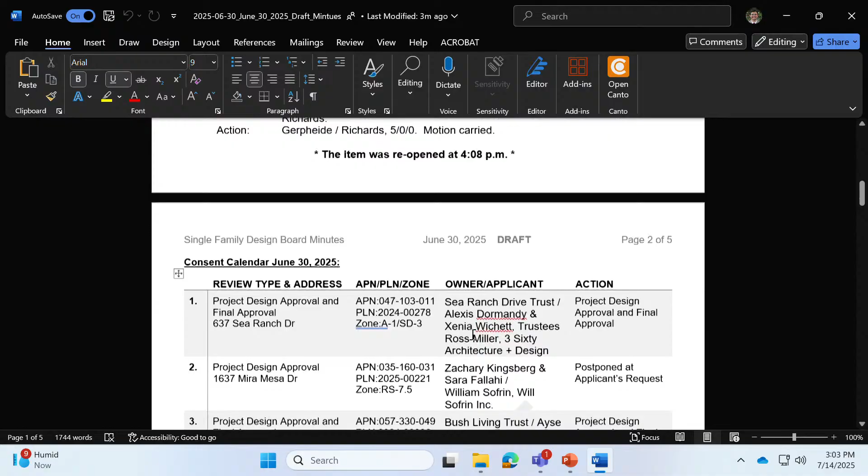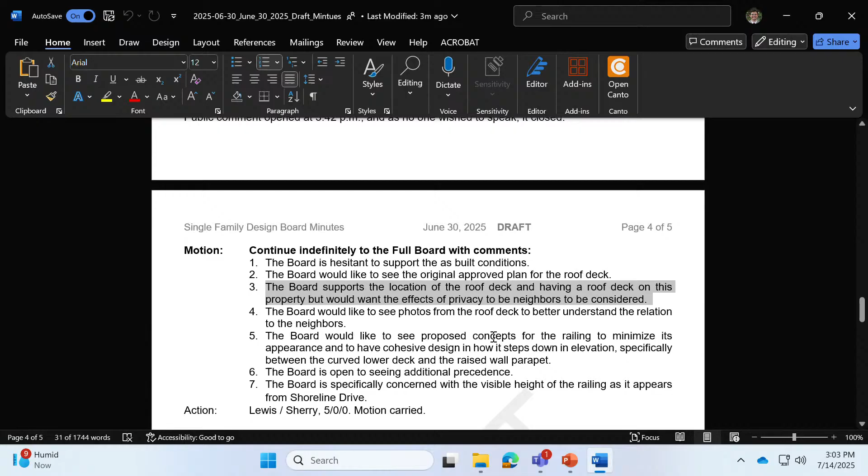Chair Lewis, item 2, comment 3 - the board supports location roof deck, item 3, like the end of the sentence, privacy of the - was it part of your? But would want to know the effects of privacy for the neighbors, to be considered. Thank you, just that, I didn't see anything else.

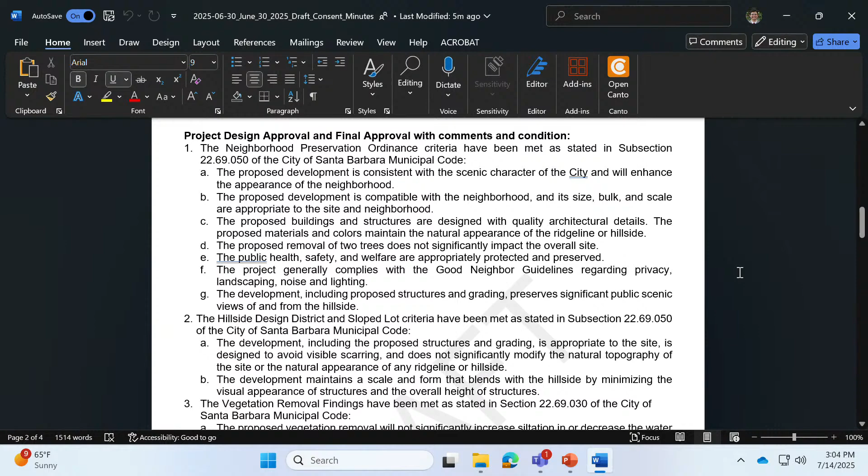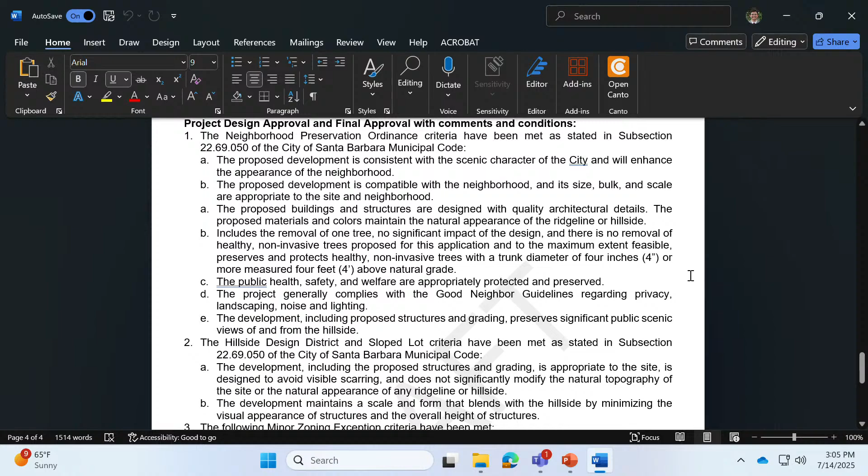Next is approval of the minutes from the consent meeting on June 30th. Keep going. You go down to the bottom of the page.

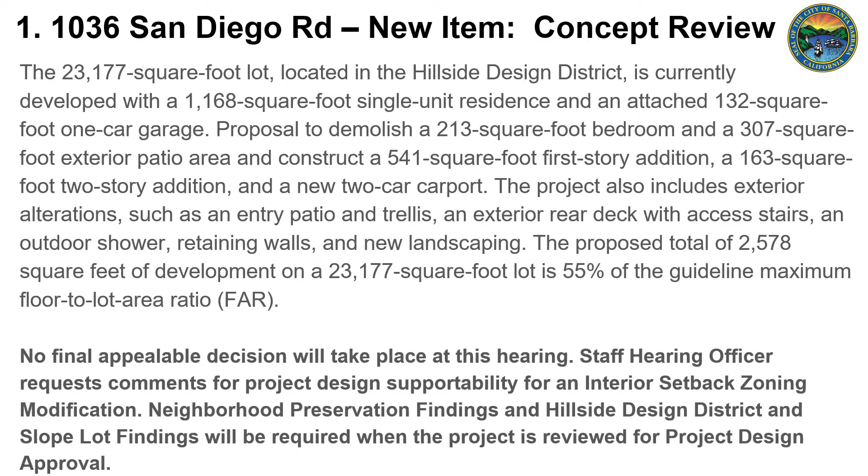No final appealable decision will take place at this hearing. Staff hearing officer requests comments for project design supportability for an interior setback zoning modification. Neighborhood preservation findings and Hillside Design District and slope lot findings will be required when the project is reviewed for project design approval.

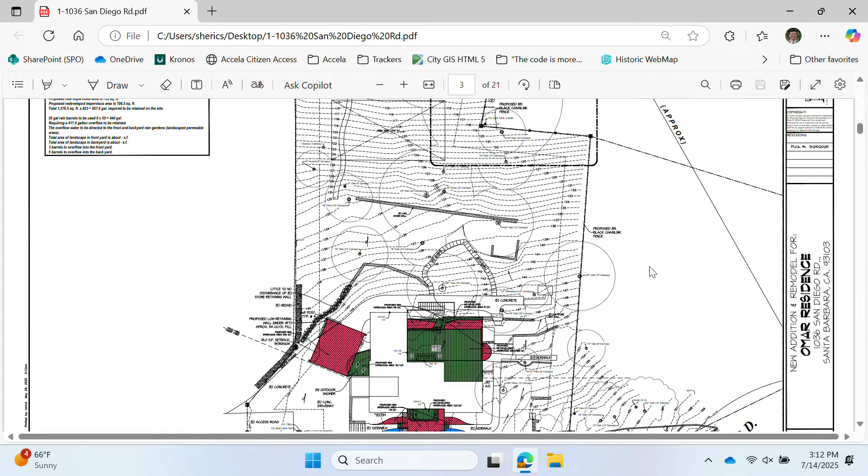In the other areas, we provided drawings showing all the details. This is showing you the hillside. Sorry, I'm used to PowerPoint, so this is challenging a little bit for me because it's a touch PDF screen. There's a touchscreen, and a mouse. Okay, the touch screen solved all the problems.

Very appreciated. So this is the hillside, and now this is the house. This is the carport, and this is right here. You see the 10-foot, so this is the carport. This is the front entrance facing east.

We're not really doing big things there, but just beautifying, and I'll show you the pictures of how you enter the house. This is the proposed addition, and you'll see that we will demolish an existing one-bedroom, and there is a patio here that's really not heavily used, and this is where we would build a 500 some change square feet. Then on top we're going to have a beautiful staircase here, and on the second story we're going to have a primary bedroom with a bathroom, that's going to be about 163 square feet. Again, I don't get my numbers perfect, and I'll explain that later.

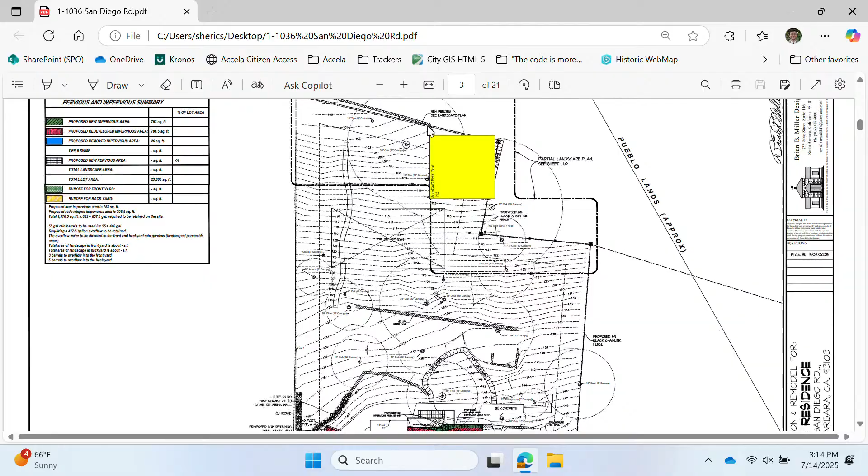So the green is the addition, as well as this carport, and then modifications here to the front. Then we propose to do some landscaping down here, including a fence and finishing a retaining wall that's only 30 inches in height. And I will cover all of that as well.

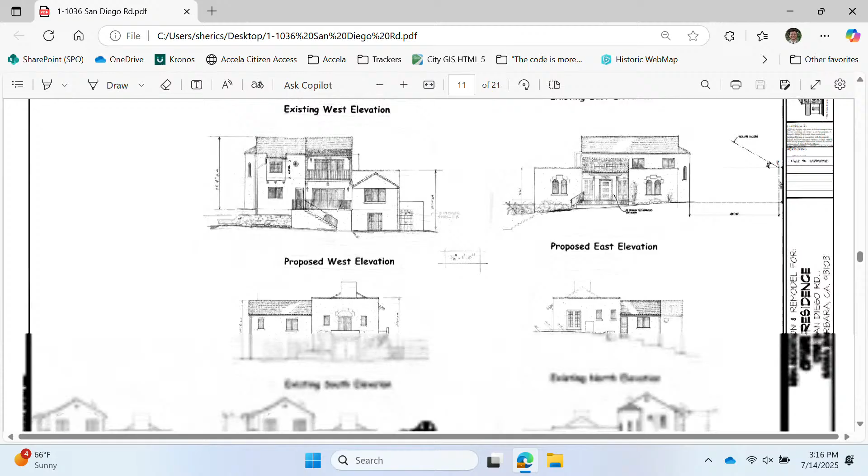Notice here and here, this is all existing and will not be touched. This is the second story addition, and this is the staircase I've been talking about. Just to complete this, as you come up the driveway, these are the stairs to enter the house on the east side.

So this is the south side. This is the one-car garage. Obviously this is a very old house with only a one-car garage, but we have a lot of space here and we thought there's no need to really change this beautiful picturesque view. So the best solution was a carport, and this is really the best place to fit it.

Now, this is what the second story would look like from this side. And this would be the new look without the carport, and with the carport addition.

And now finally, the north side. This is the current structure, everything stays the same, and now we have the staircase I talked about, and this is just... I have to be personal here.

My oldest brother lives in Spain, and this is just beautiful, absolutely beautiful. You see this in some of the structures and homes in Spain, and Brian did a great job.

So I think this covers everything I wanted to cover about the building and the additions, and I just wanted to spend a little bit of time talking about the landscaping. Again, this is the existing house, and this is our driveway coming up. That's the entrance. Now this is the west-facing side, and this is the hillside.

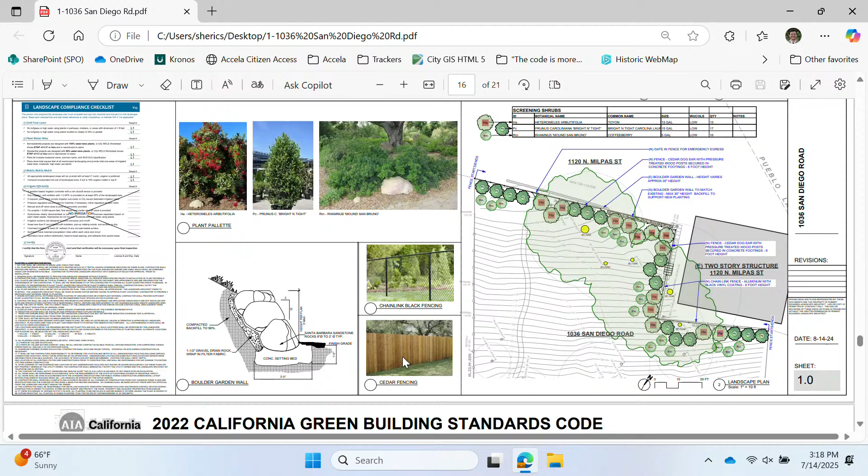What we would like to do is some landscaping down here. This is the parking lot for the ball field, and there's fencing on this side - this is really a privacy and safety issue. What we're proposing here, I'll show you a picture, would be cedar fencing on that side. Even though it's not facing a public area or a street, it would still be beautiful to look at. And then we have landscaping all along the side.

On the side of the property going up this way, we would do fencing - chain link, black fencing like this - matching what the ball field is using on the other side that's visible from our property. I think that's all I had to say. I really appreciate your patience with me, and I'm happy to answer any questions.

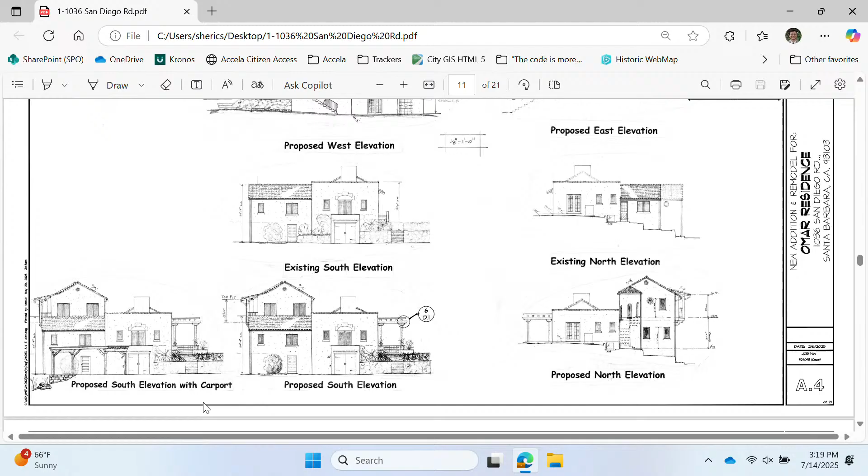I know in one of the drawings I studied this morning, some of the details drawings. Through the chair to the applicant, if you go to sheet number 2, if you type in number 2 in the page numbers, that should take you to the site plan.

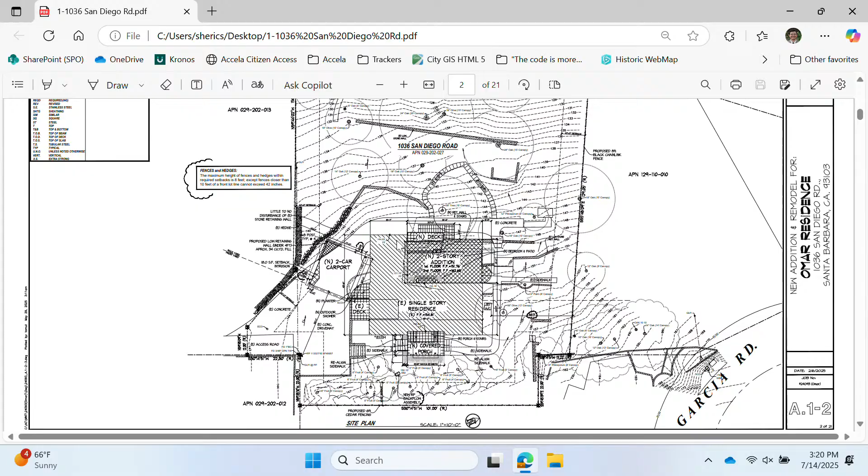If you scroll down a little bit, the carport I think is to the left of the home, by the carport and deck. Right around here, that area, the little triangular space. Okay, I know I saw it in one of the drawings. So for the board, it's over here.

Board Member Richards, any questions? Yeah, are there any trees being proposed to be removed as part of this project? No, sir. Okay, fantastic. And then does the carport have a solid roof over it, or what is it? I didn't see the details.

I believe so, the material we talked about. Yes, it says standing seam metal roof on your section and elevation. Okay, and that's on page 12 if you want to go to it. Yeah, here it is, thank you. Okay, all right, those are all my questions.

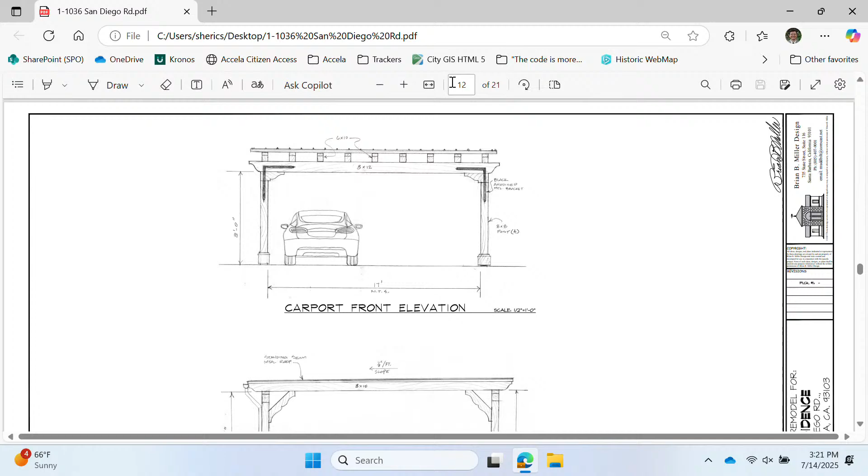Okay, Board Member Mosley. I have one question regarding the height, the maximum height at the highest roof pitch. I think I saw it on the elevation. Is it 25, or can you go to it?

It's just, yeah, page elevations, page 11 I think has the elevations. There you go. I think it's 25 feet and 4 inches. Yes, 25 feet and 4 inches. Okay, just wanted to confirm that.

And this project is still in their application completeness review, and so that was one of our staff's comments, was to clearly state the noticed height. So that will be addressed within a resubmittal.

Thank you. And do you know from the conversations with the architect about the design of the railing of that balcony? Right here, is that, or up here?

Yes. Oh, maybe Board Member Mosley, may you turn on your microphone when you're speaking? It's just a reminder. It is on. Oh, maybe it was not close enough. Yeah, maybe it wasn't. Thank you.

The design of the railing, both the stairs and the balcony. I can see some details that it was drawn, but wanted to see about the materiality. Was there any conversation on what it will be? The material, I have to say I'm recalling from memory, so we're happy to answer that more formally. But I know we talked about doing wood up here, but metal for the staircase. Okay, that's correct. Okay, thank you.

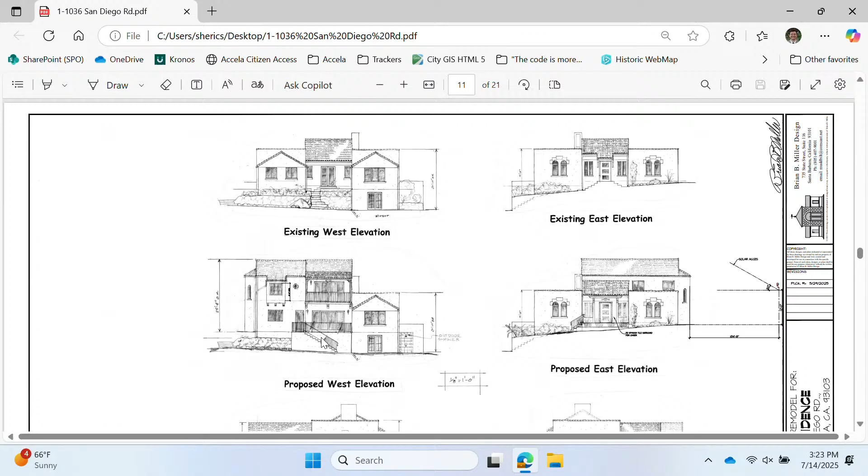I think that was my questions. Okay, Board Member Sherry? Can you go back to page 2, please, the site plan?

And I just want to understand and confirm that the need for the interior modification is because there's no other way to fit the carport, due to the interior setback snaking around and going through that driveway. The best angle and location to put the carport, encroaching into the setback the least, is in the configuration and angle you have now.

That's correct, right? I would like to confirm that, because this carport ended up taking a lot of time and a lot of measurements of different possibilities. And this is the best - I think Brian answered this to the city in the first letter. It basically ends up involving a lot of slope filling, et cetera, and would get pretty complicated if we didn't do this. So this was the best possible scenario with the least amount of disruption.

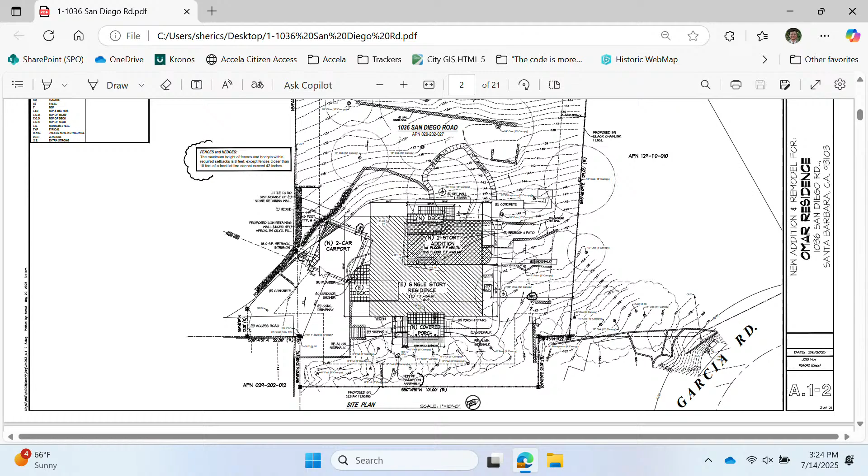Board Member Graffiti asks a question: just to confirm, does the property back up to a property line with the Santa Barbara Bowl on the side, or was that about parking? Can you go back to that image?

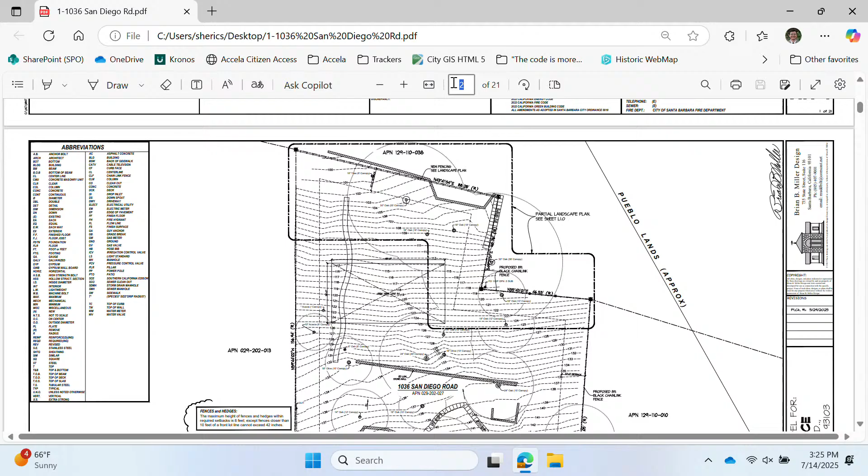So we're very close to the bowl, but we don't exactly back up to it. Let's go to the aerial image, slide 16. Here it is — this is the parking lot for the bowl, and this is all bowl property. We're on top of this sloped hill.

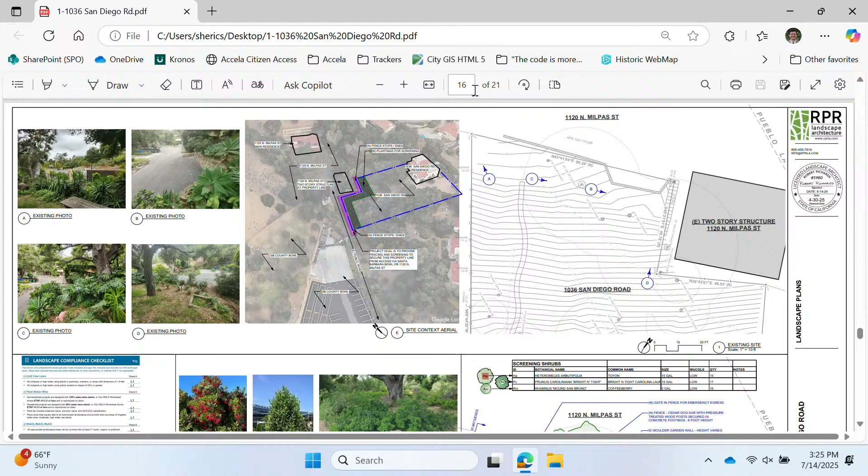Okay, thank you. I think all my other questions are answered. Appreciate that. Okay, we will move to comments. Board Member Richards, do you want to start?

Sure. I think it's an attractive project. You're trying to locate the carport in the best possible location given the constraints you're having to work around, so I can support the modification.

Board Member Mosley: I agree, and I think that's the best configuration for the carport, so I can support the interior setback modification. It's a nice project, developed cohesively to the second story, and I would like to see more details and materiality next time.

Absolutely, sure. Board Member Graffiti: Yeah, agree. As long as the materials and details are all cohesive with the existing architectural style, I'm happy to support it. Would also like to see imagery for landscaping and detailing inspiration at the next meeting.

Board Member Sherry: I agree with all the comments. My only concern is the standing seam metal roof on the carport. I understand you can't see it from anywhere else, so I'm not concerned about neighbors seeing it, but you will see it from your second level. It introduces a different material that isn't necessarily in keeping with this style of house, so I'd want you to make sure that's the most sensitive material choice for a carport roof to be in keeping with the Spanish colonial style.

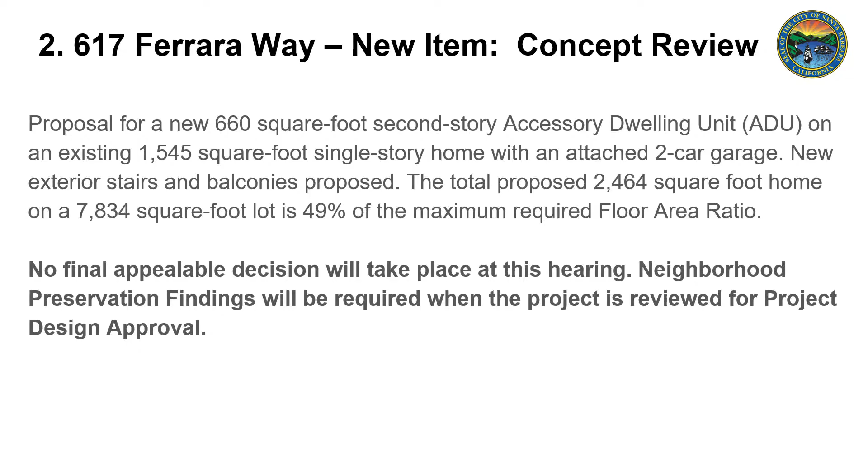Neighborhood preservation findings will be required when the project is reviewed for project design approval. The reason this project is before the board is because the accessory dwelling unit doesn't meet the architectural design criteria for ADUs, because it's a second-story ADU that is not constructed entirely over the garage. I also wanted to provide background on the FAR: it is 49% without the ADU, which is what's in the scope. But with the ADU, which the applicant provided an accurate FAR for, it's 70%. The difference is that without the ADU it's 1,545 square feet, and with the ADU it's 2,205 square feet. So the total square footage in the scope is a little off, due to a staff error in calculations, but I wanted to provide that clarification.

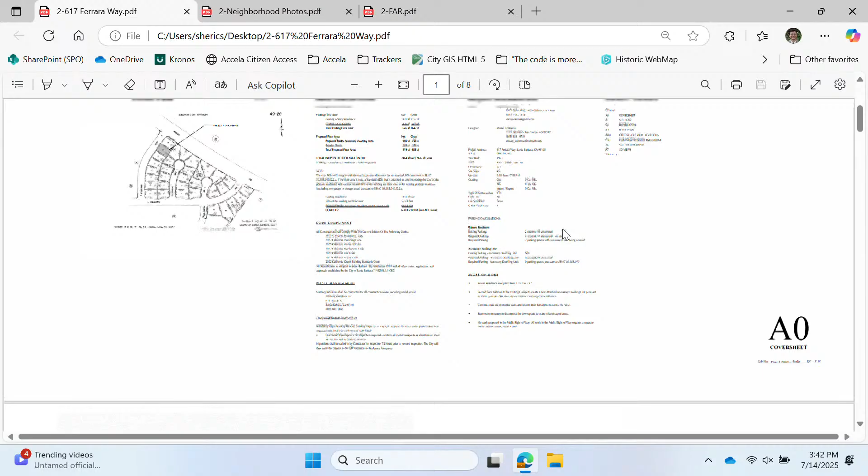Thank you all for your time. I am here to present the proposed ADU that is going to be a second floor addition above the garage. As Sebastian mentioned, it's not entirely above the existing garage footprint -- it extends about 250 to 300 square feet beyond the garage outline footprint.

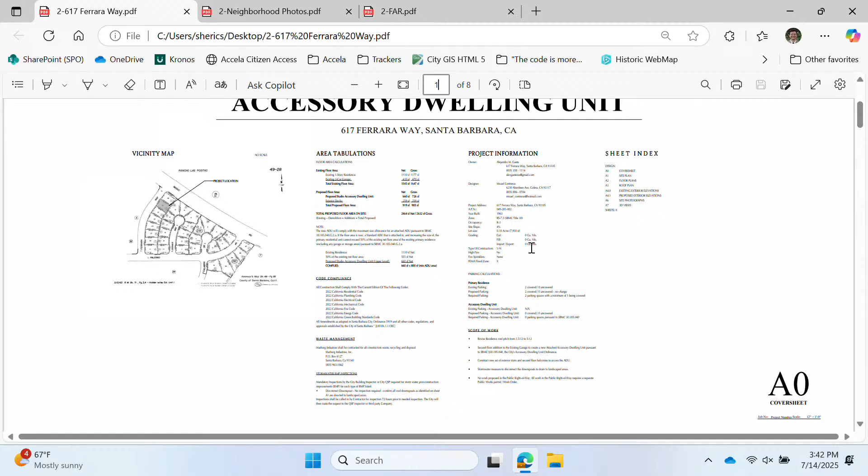The area this is in is on Modoc, right across from the Emmanuel Church that is directly across the street from this property. It's mostly a residential area with many multi-family apartment-style buildings, so it's a very eclectic architectural style throughout. I went through the archive drawings and noticed a lot of them had varying roof pitch slopes ranging from 4-and-12 to 6-and-12, so that was the reason we went with 6-and-12.

We also wanted to add more volume in the interior of the spaces. Another part of the scope of the project is to change the roof pitch of the existing residence to 6-and-12 to match the ADU.

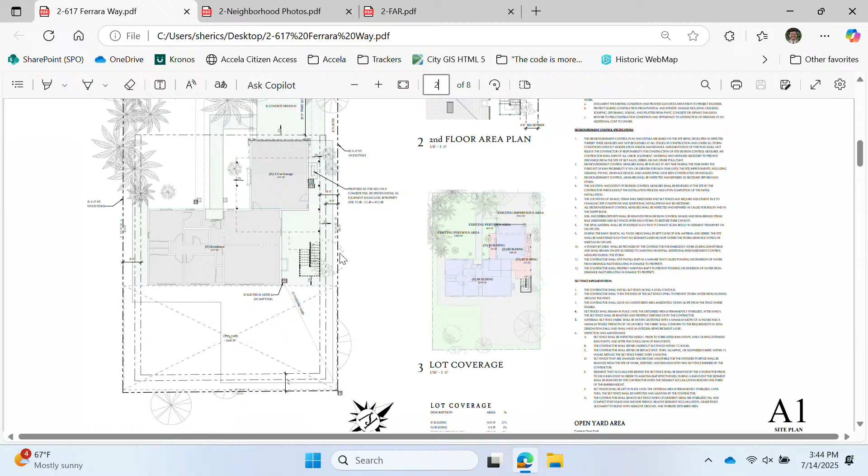Here you see the area site plan. Nothing is changing on the ground plane as far as solid volumes, though we are adding stairs to get up to the ADU towards the side yard. Here are the floor plans, showing access from a balcony on the south side into a living area and up to the one-bedroom ADU unit, with a deck facing the street on the north side.

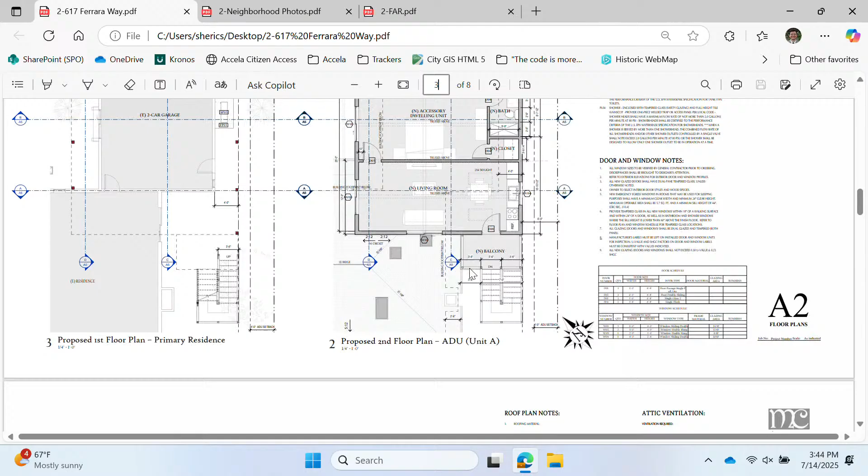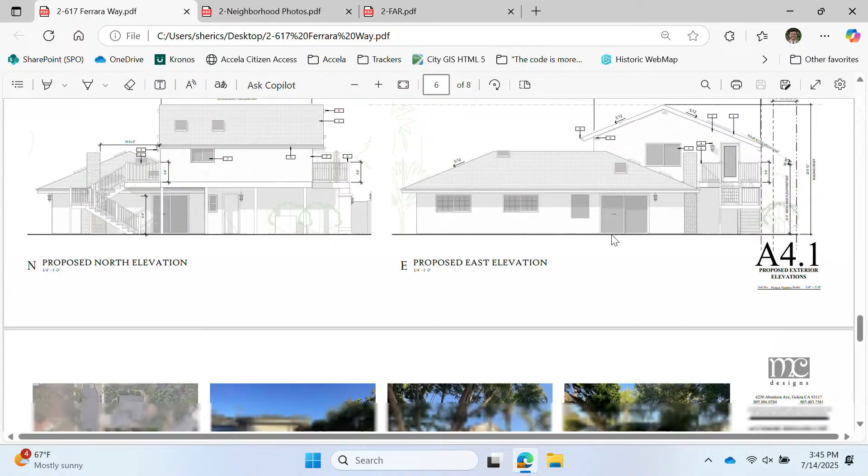Here are the existing and proposed roof plans with skylights on the east side. These are the existing and proposed elevations, trying to keep with the same aesthetic as the existing house. And here are photos of the surrounding lot as well as the existing house.

Here are some 3D renderings to show what that will look like, and here are site neighborhood photos to give context of that eclectic style I was talking about. This is our subject site, 617 Ferrara Way. This is our key -- I believe there was another file with higher quality resolution photos, but this gives a general idea of what we're dealing with and how we fit into the existing neighborhood.

And these are all in that same vicinity. So here's the church across the street. Let's see, I think there's a couple more pictures of that. There's another, and another. And here's the FAR study.

That shows we're at 70% FAR, and that concludes my presentation. All right, thank you. We will move to public comment. I'll start with in-person public comment. At this time, I do not have any slips for this project, and I don't see anyone in the audience to make a comment, so we will move on to virtual attendance. At this time, I do not have any hands raised for virtual comment, and we did not receive any written correspondence for this project. So with that, I'll turn it back over to you, Chair Lewis.

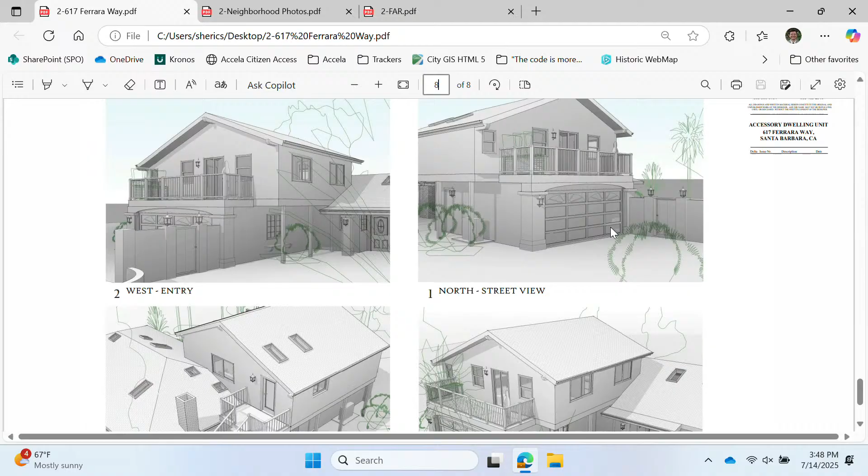Okay, what is the plate height there that we're looking at in that north street elevation? It looks like it's quite low. Yeah, let me see. I believe we had... let's see, an 8-foot plate for the garage standard, and a little lower on the bathroom side for upstairs, and then 8 foot on the other side. So a 17-foot plate on this end gives you a 22'6" total building height. Okay.

And then, is there a reason the house was intentionally overstepping the garage and not matching that square footage? It seems a little odd and like it doesn't match the neighborhood. So yeah, the client wants to first use it as a gym for his kids. Right now if you go to his home, he has working out stuff and punching bags throughout the house, so he wants to consolidate that into this space, use it as a gym for now, and then leave it as an ADU for the future.

And so those overhangs, are they being held up by wood columns, or what's the detail you're envisioning? So it's like you have the garage, and then you have... Yes, you're right, the columns sit over. So those columns, are they wood? Steel columns. Steel, yeah, wrapped with wood to make it more visually pleasing. I think that's all my questions.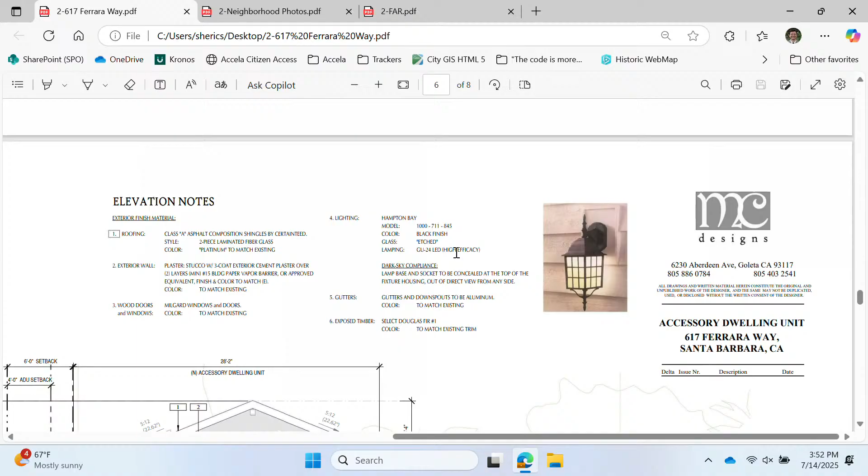I don't have the material board, but I do have the callouts here on A4.1. Does it mention the color of the windows as well? Match existing. What's the existing color of the windows? We can see it from the pictures. They are white.

Okay, that was all my questions.

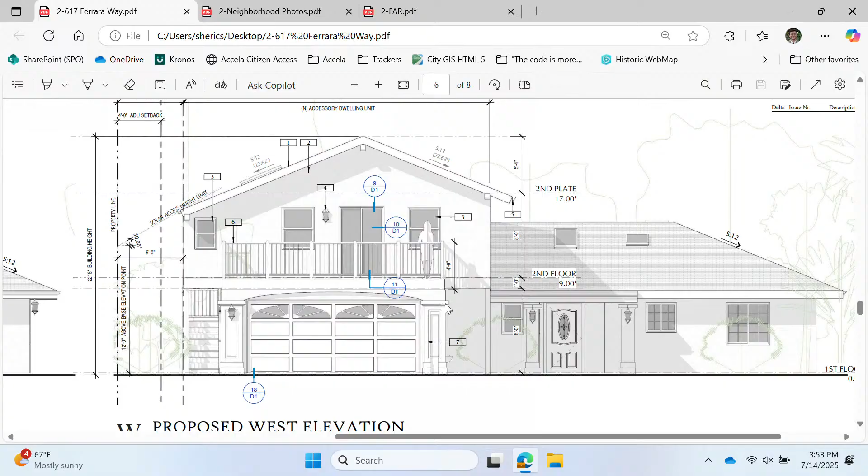Board Member Graffiti: I'm just trying to understand, for the second story element, is it exceeding the area of the garage on both sides? Can you go back to the elevation or floor plan so I can see the footprint of the second story compared to the first story? Can we look at all of them? On drawing 3, if you slide over on A2, drawing 3, maybe start from there.

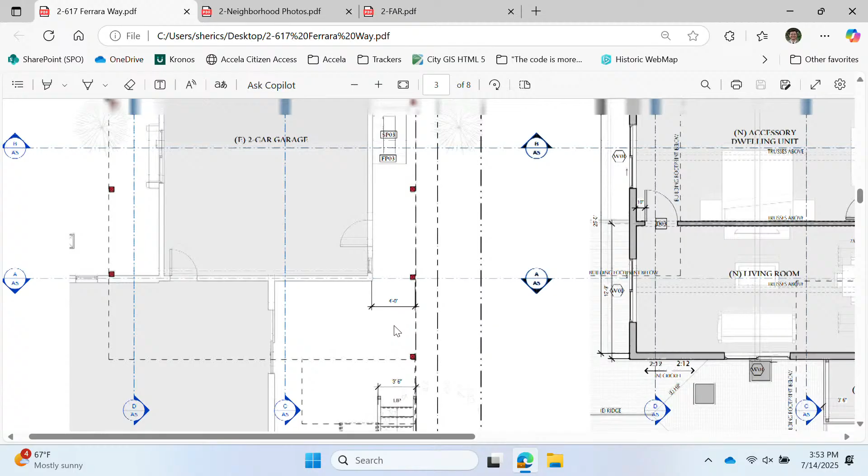Yeah, so this is the footprint dashed here. Okay.

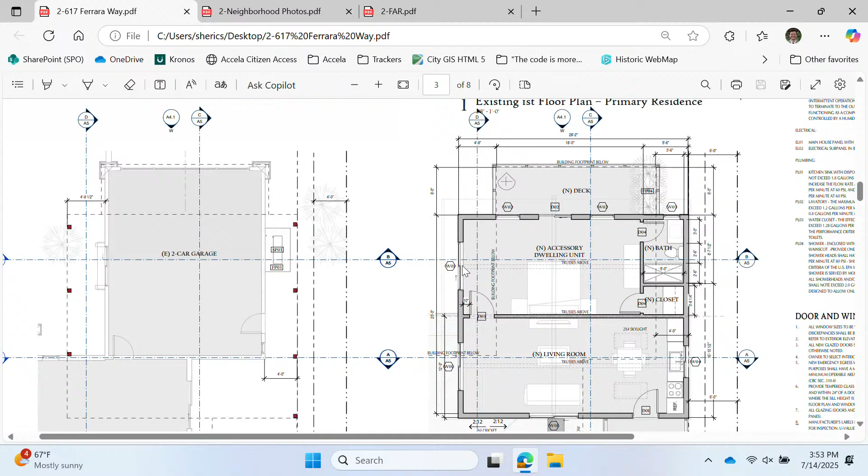What did you study - I guess, when this question was asked earlier of why that's happening, was your response just to maximize total floor area on one floor versus adding space to the first story, or thinking of other ways so the second story isn't feeling so top-heavy in proportion to the first story?

Right, yeah, this was to maximize the floor area above, on the same floor. They really want to take advantage of their outdoor space on the ground level for their kids and hosting parties, but they just wanted to maximize that area, kind of more for a gym use. Okay, I think that's it for me.

Okay, Board Member Sherry? Can I see all four elevations on one sheet for a second, please? Trying to understand the proposed elevations.

So what I'm seeing on the left side of the proposed west elevation is the back staircase way in the back beyond, and the reason I'm seeing that is because there's just a roof over it supported by 4x4 columns on both sides.

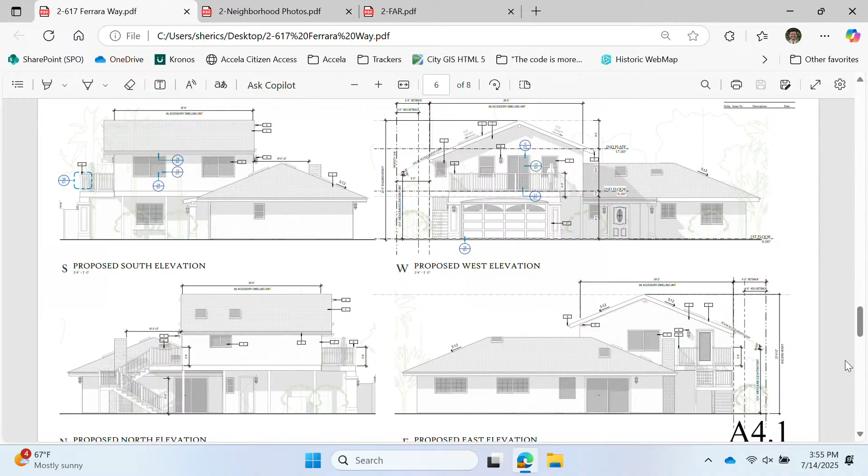And the reason the ridge isn't centered is because of the solar access, correct, yeah. Can I see a photograph of the front of the house?

Again. So it's, yeah, it's this right here.

Okay, no more questions. Will you go to A7 with the 3D views?

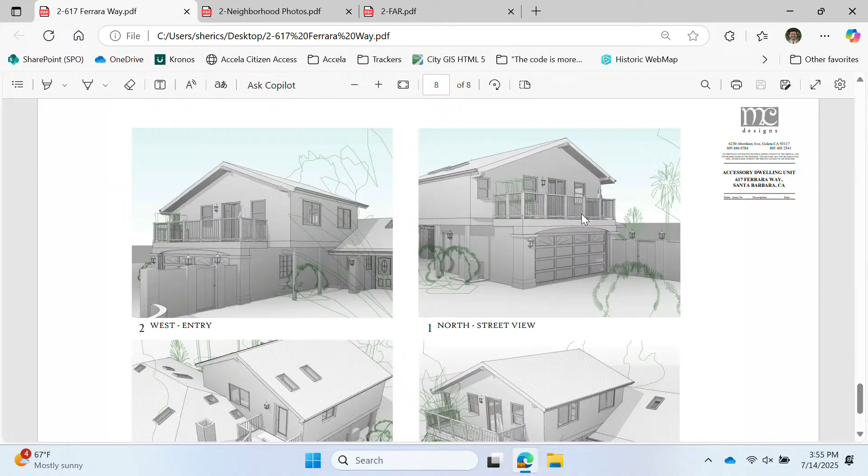So you've got the balcony entrance in the rear, and then also the balcony in the front. Are there views out from the north at the street elevation? Is that where like the views are? Yeah, it's hard to tell with the pictures because you're down low, but yeah, there's some.

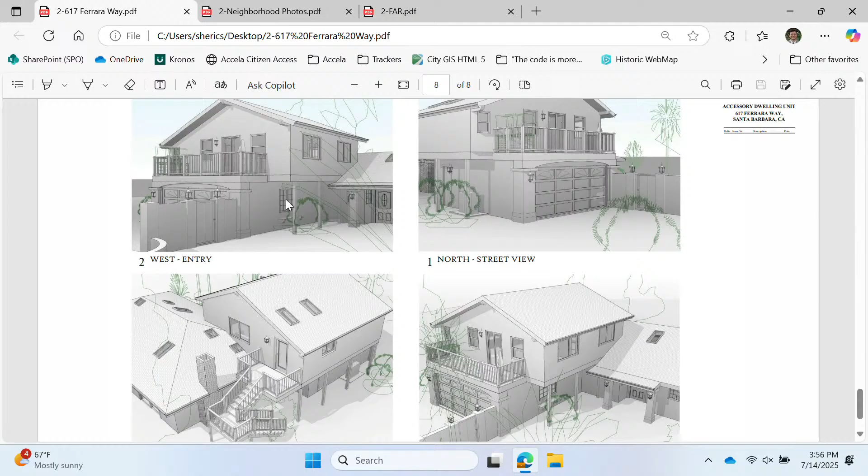I'm wondering why there's a larger front balcony instead of a larger rear balcony. They feel like they're gonna be able to use the one in the front more and keep it private, away from the back where most of their social gatherings are gonna take place, and keep a potential resident outside of their views. Right, got it, okay.

Okay, I think I'm ready for some comments, so we'll move on.

If there's ever an overhang, typically it might create a porch with some kind of weight. So right now, even the columns, pilaster-esque on the side of the garage, have a little bit of weight, and same on the front west elevation of the residence, where the columns holding up the overhang on both sides feel too flimsy, but I'm also struggling with the need for it to do that. When I overlay the floor plan of the garage to your floor plan for the ADU, it's still an acceptable ADU size, especially if it's being used as a gym.